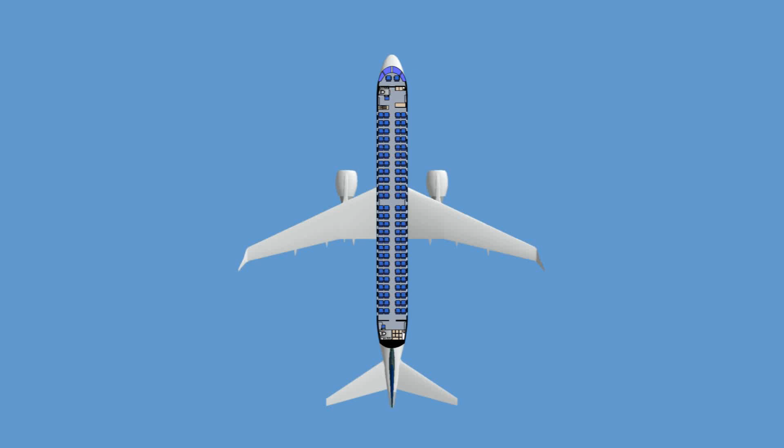The fire overheat protection system provides fire or smoke indication in the cockpit and cabin and enables the crew to extinguish the fire. The system is made up of the fire and smoke detection subsystem and the fire extinguishing subsystem.

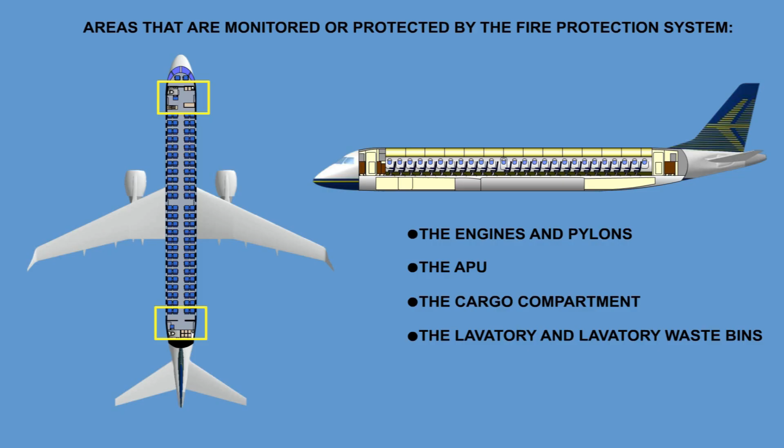Areas of the Embraer that are monitored or protected by the fire protection system include the engines and pylons, the APU, the 2 cargo compartments, the lavatories and lavatory waste bins. In addition, portable fire extinguishers are located in the cockpit and cabin.

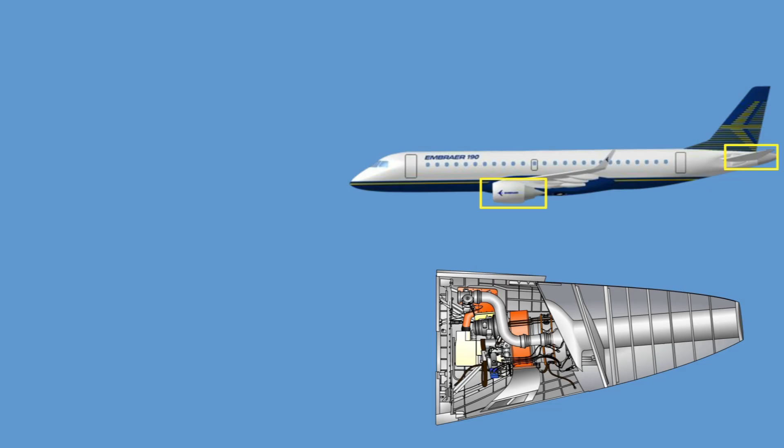The engines and APU are monitored by a fire and overheat detection system. If a fire occurs in either the engine or APU compartment, it can be extinguished by the respective fire extinguishing system. The cargo compartments are monitored by a smoke detection system. They are equipped with a single fire extinguishing system for both compartments, which is built around 2 fire extinguishing bottles.

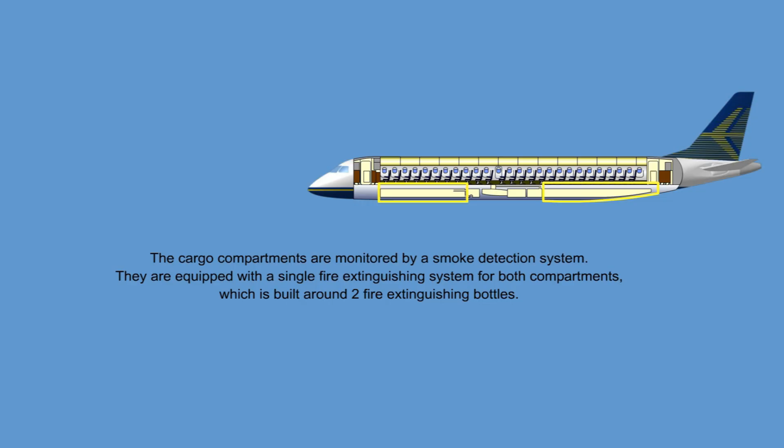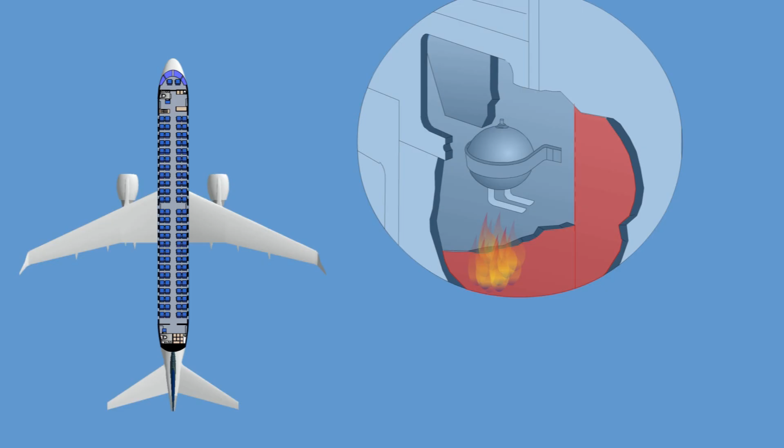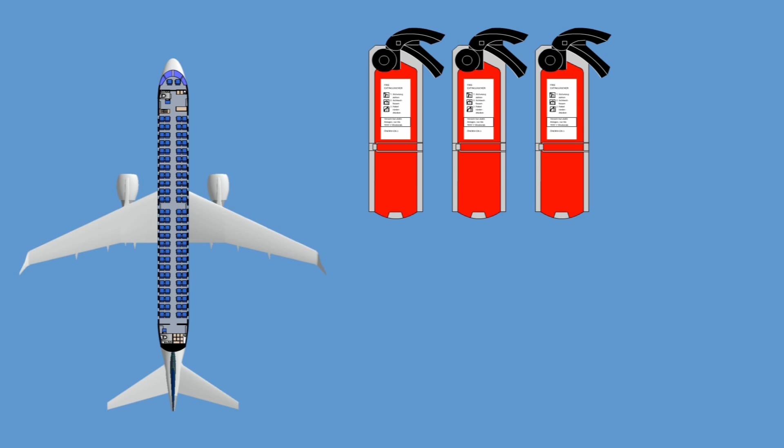The lavatories are equipped with a smoke detection system to alert the crew. In case of a fire in the lavatory waste bins, a fire extinguisher will automatically be discharged into the waste bin. To fight a fire on board, the crew can make use of the portable fire extinguishers installed in the cabin and cockpit areas.

The following equipment is installed on the overhead panel in the cockpit for indication and extinguishing of a fire. The left and right engine fire handles indicate a fire when a red light in the handle illuminates. Pulling the handle will shut down the respective engine. The handles are also used to extinguish the fire by rotating them left or right.

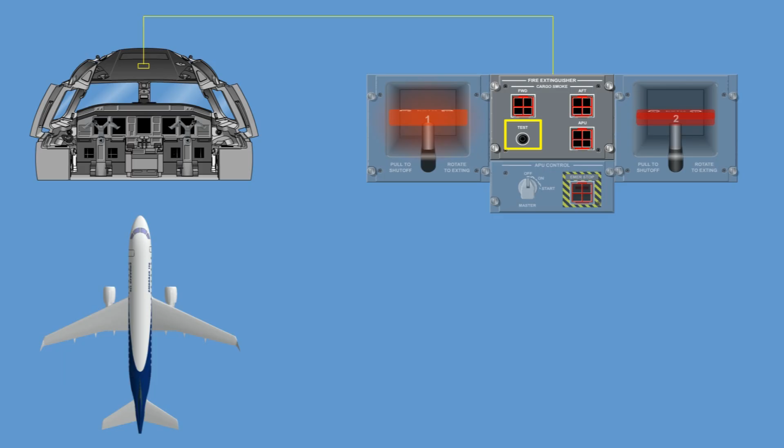The APU can be shut down by the crew in the event of a fire using the emergency stop button on the APU control panel. The fire extinguisher control panel, located between the fire handles, allows the crew to extinguish a fire in the cargo compartments and in the APU. A test switch allows testing of the entire fire detection system. If a fire is detected, the respective warning messages will be displayed on the EICAS and aural warnings will sound.

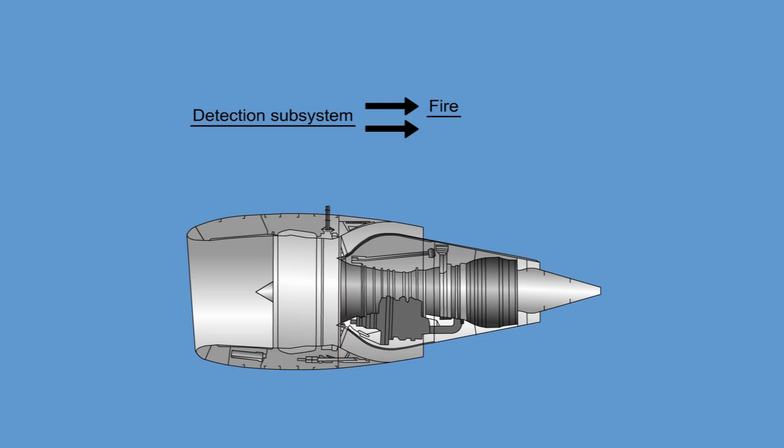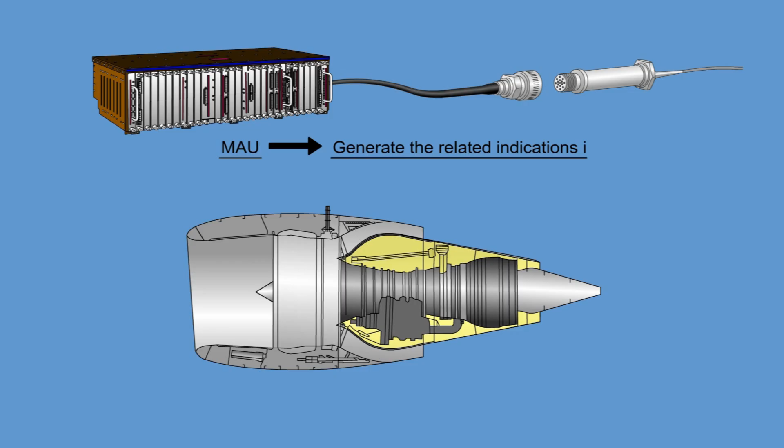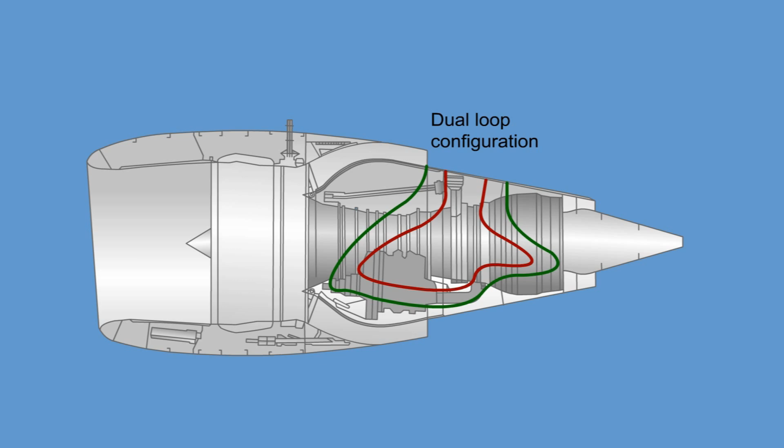The detection subsystem provides means for detection of fire or overheat conditions in the engine-designated fire zone by the use of fire detectors. These fire detectors are connected to the MAUs to generate the related indications in the cockpit. The fire detectors are installed in dual-loop configuration, which means that each detector of loop A will have a correspondent detector of loop B protecting the same area. This configuration allows the aircraft to be dispatched with one loop inoperative.

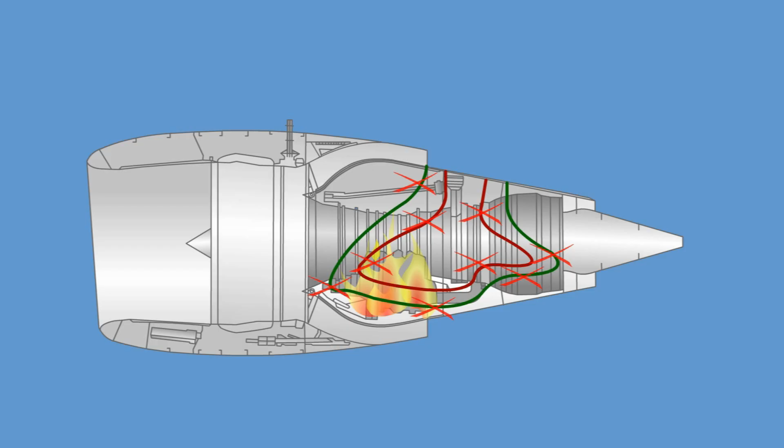During normal operation, both loops must detect a fire to provide a fire alarm in the cockpit. However, with one loop inoperative, the alarm will also be enabled when the remaining operative loop detects fire. If both loops are failed, an EICAS message is displayed.

In case of fire, the following indications are provided to the crew in the cockpit: the flashing master warning light, an aural warning in the cockpit, an engine 1 fire or engine 2 fire warning message on the EICAS, a fire inscription on the ITT icon, and a red light in the fire handle assigned to the engine where a fire was detected. The aural warning can be silenced by pushing the master warning button.

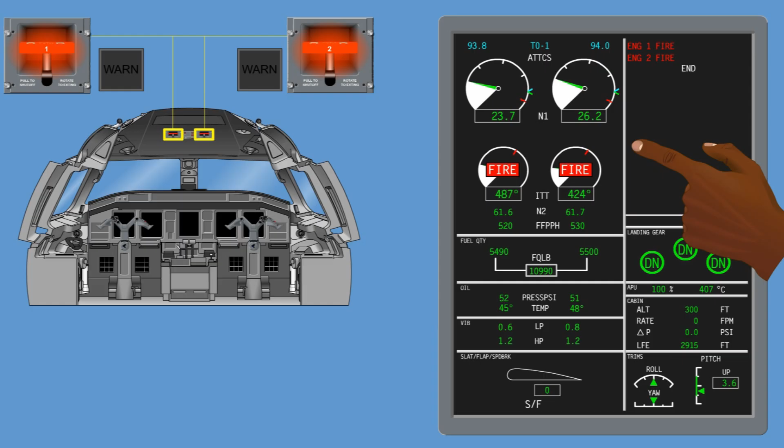The master warning light will then go off. However, the engine fire warning message and the red light in the fire handle will remain on until the fire is extinguished. The fire extinguisher panel in the cockpit allows the crew to manually test the fire detection system, fire illumination in the fire handles, warning messages, master warning push button, and the aural alarm.

Pushing this test also tests the APU fire and the cargo smoke detection systems. Performing the test with APU running should not take more than 10 seconds. Otherwise, the APU will shut down.

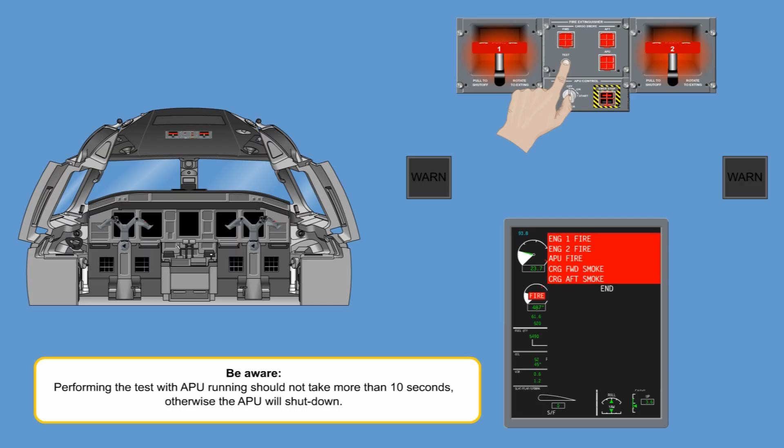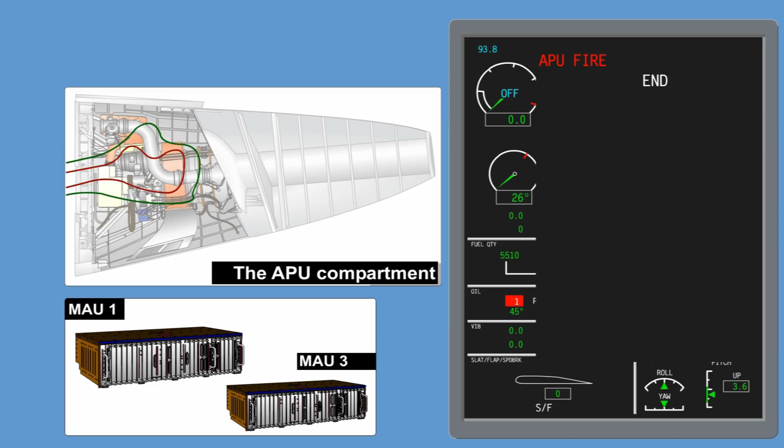The APU fire detection subsystem uses two pneumatic fire detectors to detect a fire or overheat condition in the APU compartment. The fire detectors are similar to the engine fire detector in design and function. The fire detectors are connected to MAU 1 and 3, which supply indications to the EICAS and CMC. The APU fire detection system receives electrical power from the essential DC buses via the MAUs. There are two loops with one detector each, protecting the same area.

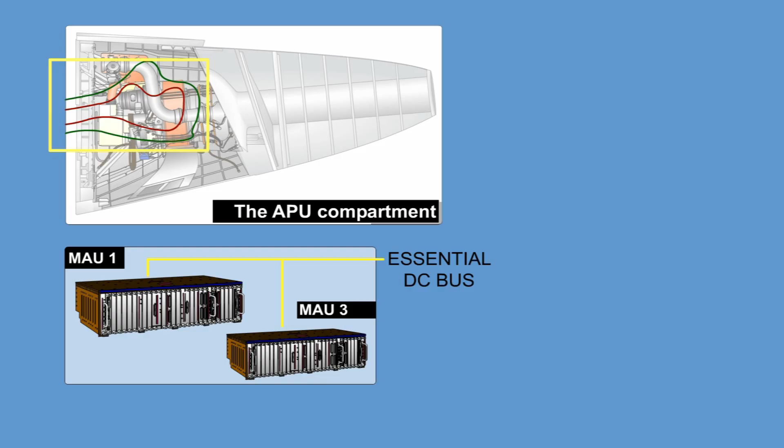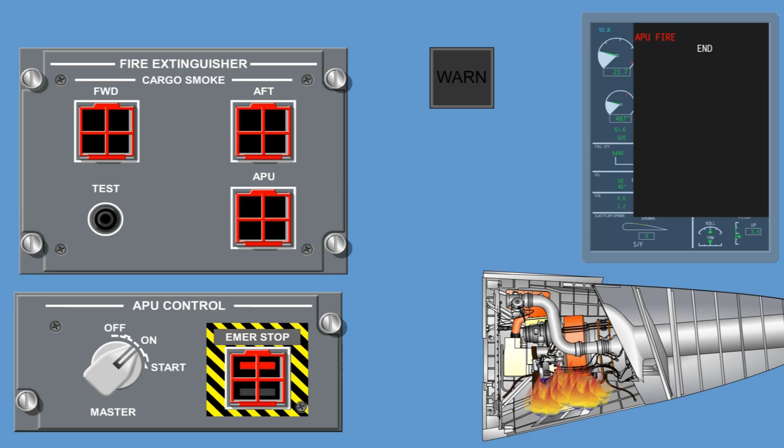If both loops detect a fire condition during normal operation, the MAUs will generate an APU fire warning message in the cockpit, and the red striped bar of the APU emergency stop button will be illuminated. When pressed, this button will shut down the APU immediately. The red illumination will turn off, illuminating the white striped bar of this button, and the APU fire extinguisher button will illuminate.

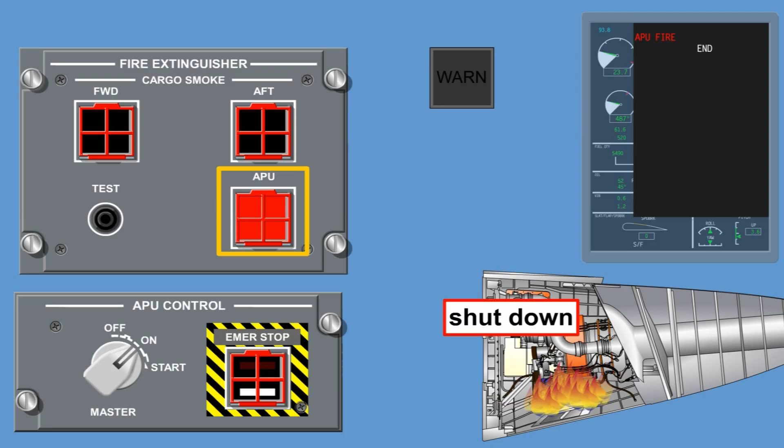If, in the event of fire, 1 minute has passed without the MAU receiving a positive indication that the APU emergency stop button was pressed, the APU fire extinguish button will illuminate. If there is an APU fire on ground, the APU will shut down automatically after 10 seconds if there is no commanded shutdown through the APU emergency stop switch.

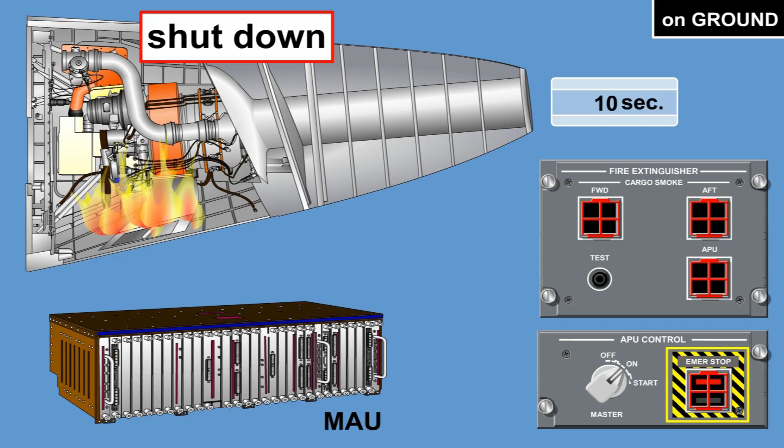The fire detectors will be continuously monitored. When both loops are failed, an APU fire detection fail message will be displayed on the EICAS. In case of a fire detector loop failure, the fire alarm will be provided in the cockpit when the operative loop detects fire.

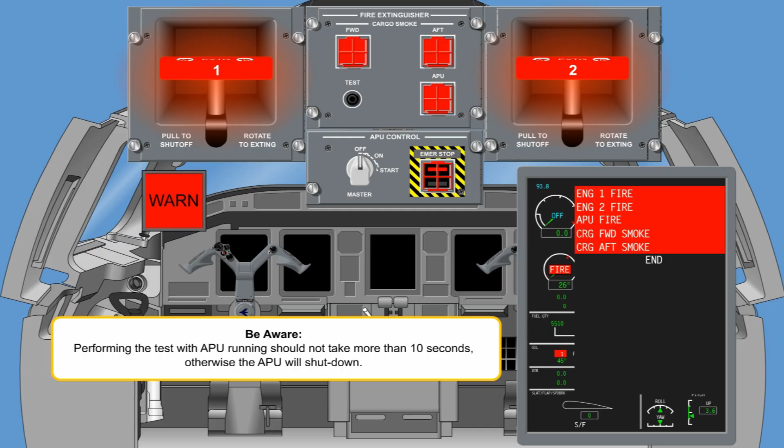A test button on the fire control panel is used to manually test the APU fire detection system. When pressed, the following will occur: illumination of APU emergency stop and APU fire extinguishing buttons, the master warning push buttons, APU fire CAS message, and aural fire warning. This test button will also test the main engine fire detection system and the cargo smoke detection system. Performing the test with APU running should not take more than 10 seconds. Otherwise, the APU will shut down.

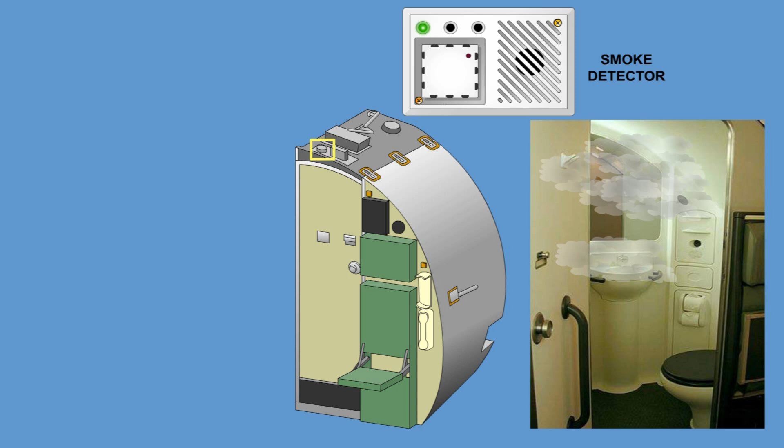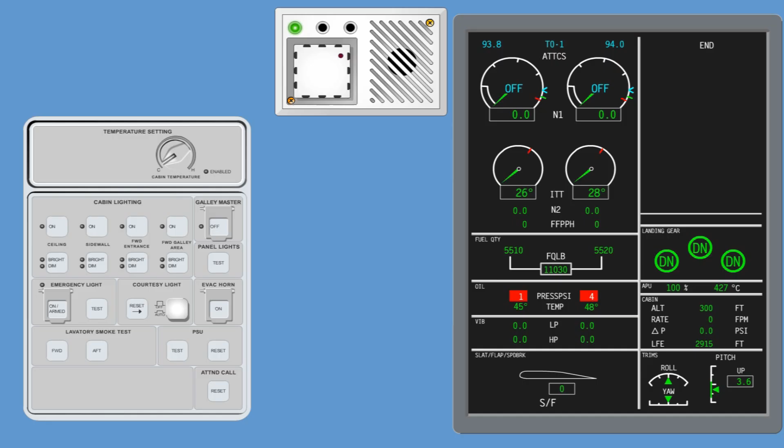The lavatory smoke detection system detects smoke in the lavatories and warns the crew. The system consists of smoke detectors mounted on the forward and aft lavatory ceiling panels and lavatory smoke test switches on the forward and aft flight attendant panel. The lavatory smoke detection system is provided with the following indications: CAS messages, aural indication through a smoke detector built-in chime, visual indication through the red alarm indicator light, and the forward and aft attendant light indicator panels.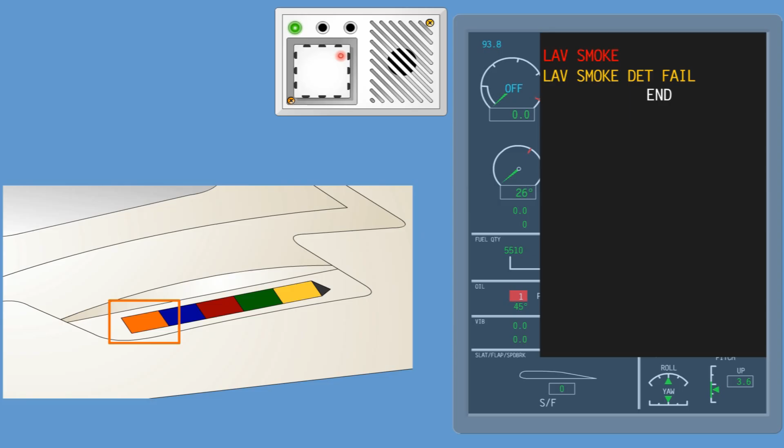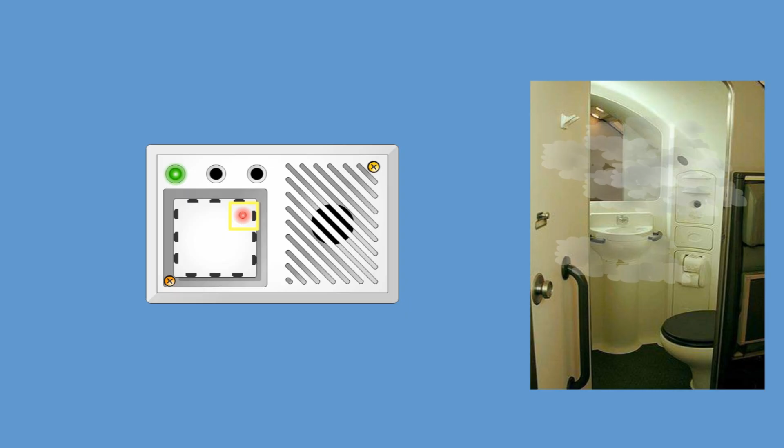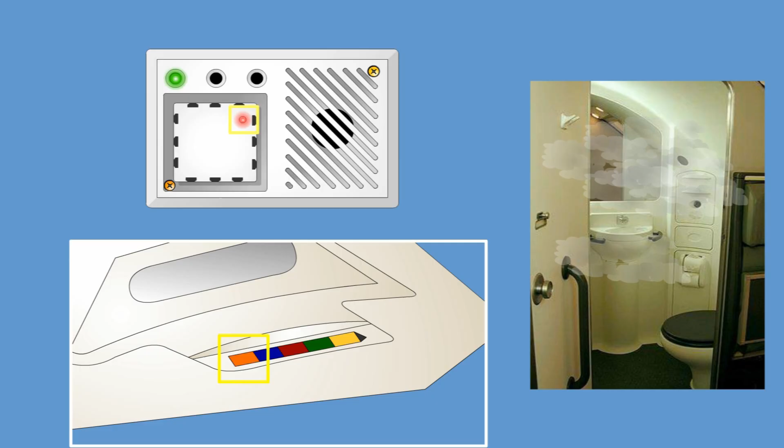When smoke is detected in any lavatory, the following sequence is initiated. An alarm will sound inside the lavatory where smoke has been detected. The chime is mounted into the lavatory smoke detector assembly and is audible from anywhere in the cabin. Additionally, the red alarm indicator will illuminate. The flashing amber light on the attendant light indicator panel will be activated, giving the cabin crew visual indication of the detection of smoke from anywhere in the passenger compartment, and a CAS warning message, "Lav smoke," in conjunction with the master warning indication, will illuminate in the cockpit.

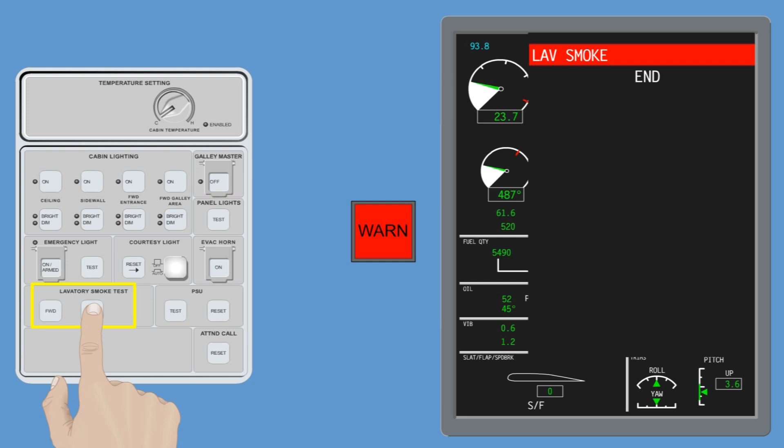System operation can be confirmed electrically by a self-test circuit, by pushing the built-in self-test switches on the forward flight attendant panel. When built-in test is initiated from the forward flight attendant panel, by pressing and holding the test switch for a particular lavatory, the smoke detectors, cabin crew, and flight crew indications are tested. After the test switch is released, the CAS message and the master warning indication are held for 7 seconds.

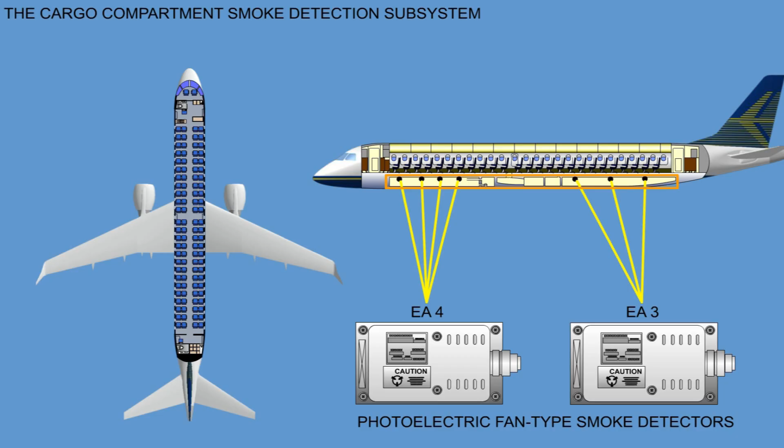The cargo compartment smoke detection subsystem is designed to detect smoke in the cargo compartment and turn off the ventilation in the forward cargo compartment. The system includes a group of ceiling-mounted photoelectric fan-type smoke detectors that are installed in recessed trays within the ceiling of the cargo compartments. Signals from the smoke detectors are routed to the flight deck via the MAUs, which process the necessary system information for the operating crew.

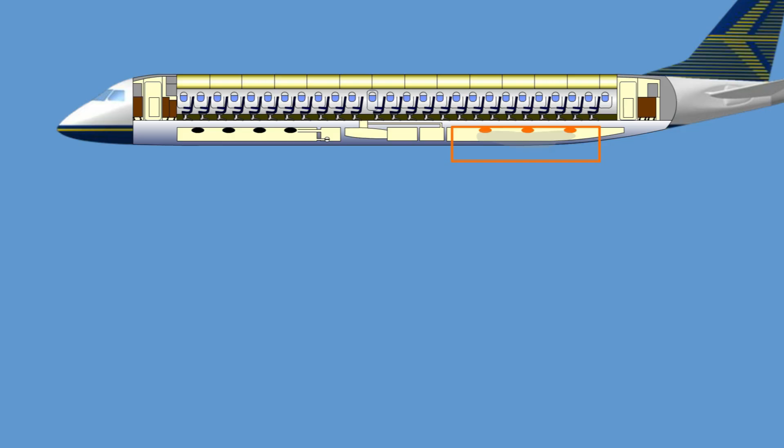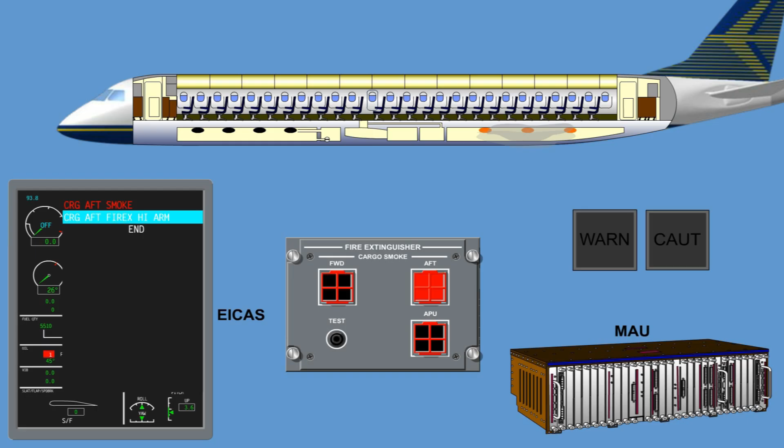In the rear cargo compartment, smoke must be detected by 2 independent smoke detector channels for an alarm to be reported to the flight deck. Indications include an audible alarm, master warning lights flashing, the aft cargo compartment fire extinguishing button illuminating, and cargo aft smoke and cargo FireX high armed messages on the EICAS.

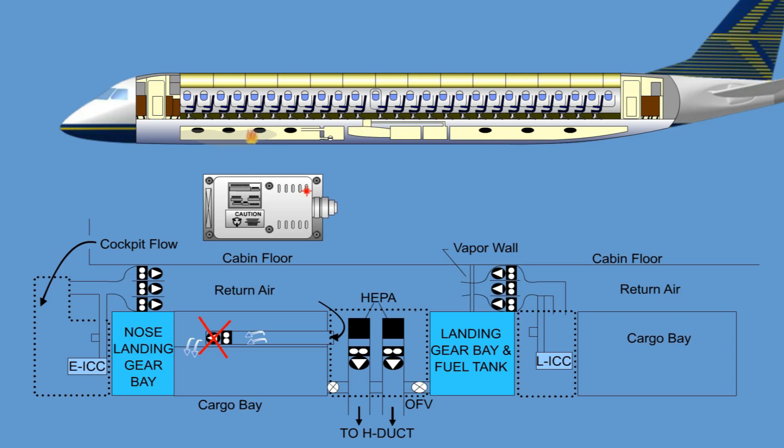The forward cargo compartment smoke detection system has a different configuration. As optional, it is equipped with an air circulation fan and cargo compartment shutoff valve. If only a single detector goes into alarm, fan operation is terminated and the cargo compartment shutoff valve is closed. The shutdown sequence starts in the forward cargo compartment without any cockpit annunciation activated. The air circulation fan is shut down for 60 seconds, and the remaining smoke detectors are monitored for 45 seconds in alarm condition.

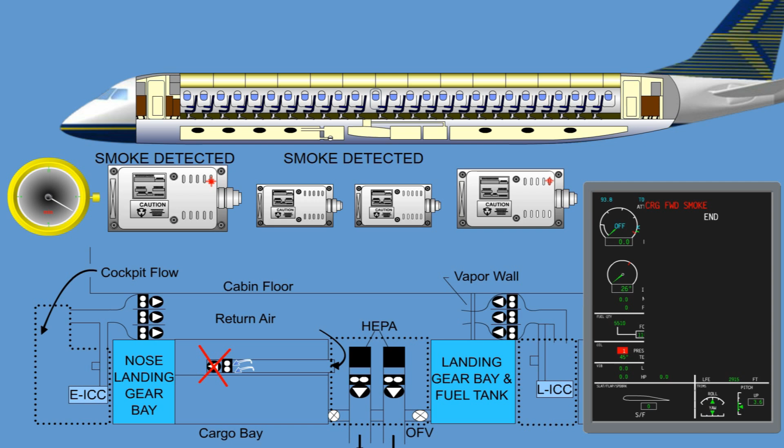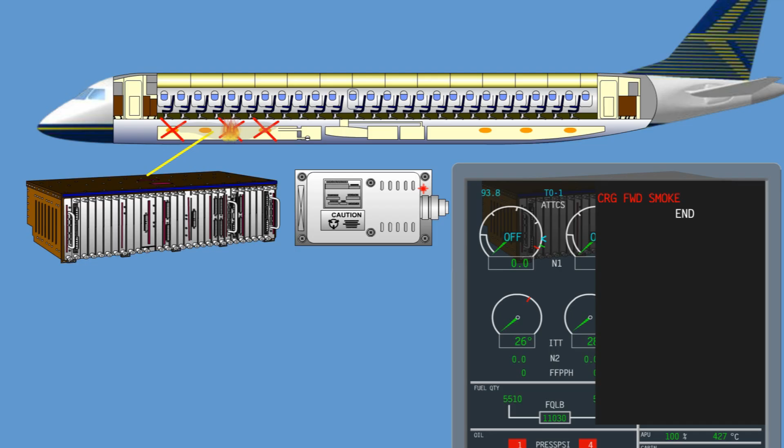Successful completion of the built-in test and absence of an alarm condition will result in the alarm being treated as a fault. Only if another detector goes into alarm within the 45 seconds is a cargo forward smoke annunciated in the cockpit. The smoke detectors are continuously monitored by built-in test. If only one smoke detector is available in one compartment, the MAU will automatically report a cargo forward or aft smoke when one smoke detector reports a fire alarm.

When the aircraft is on ground and a faulty smoke detector is realized, a cargo fire protection fault will be indicated on the EICAS. In the event that all smoke detectors in one cargo compartment have failed, a cargo forward or aft fire system fail message will be illuminated on the EICAS. Performing the test with APU running should not take more than 10 seconds, otherwise the APU will shut down.

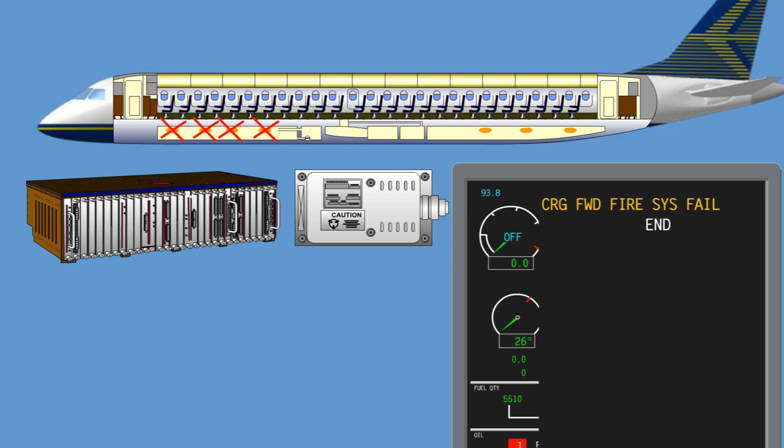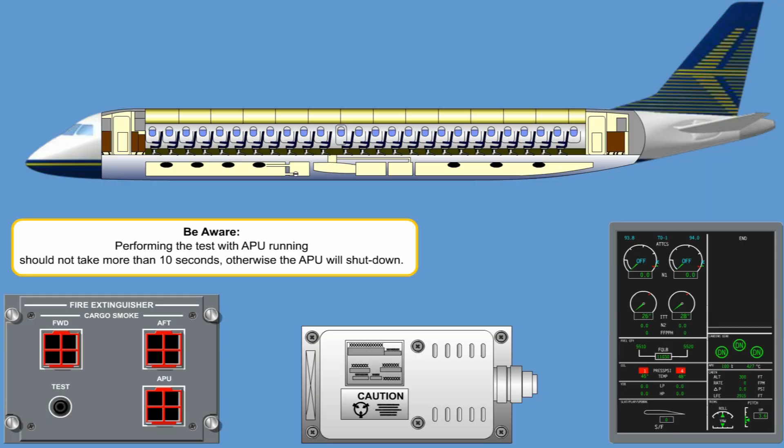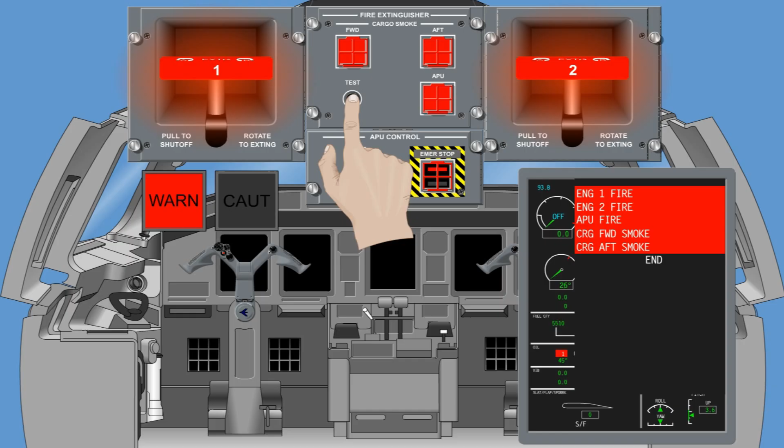The cargo compartment smoke detection system can be manually tested through a system test button located on the overhead panel. This test will verify that the smoke detectors and the flight deck interface components are functioning. Additionally, this test will verify that the fire extinguisher cartridges are not faulty. When the switch is pressed, the master warning lights will flash and the aural warning will sound. The cargo forward aft smoke message will illuminate. The cargo extinguisher lights will be activated. The forward cargo compartment fan will stop and the vent valve will close. In case the ventilation fan will not stop, cargo forward vent fail caution will illuminate.

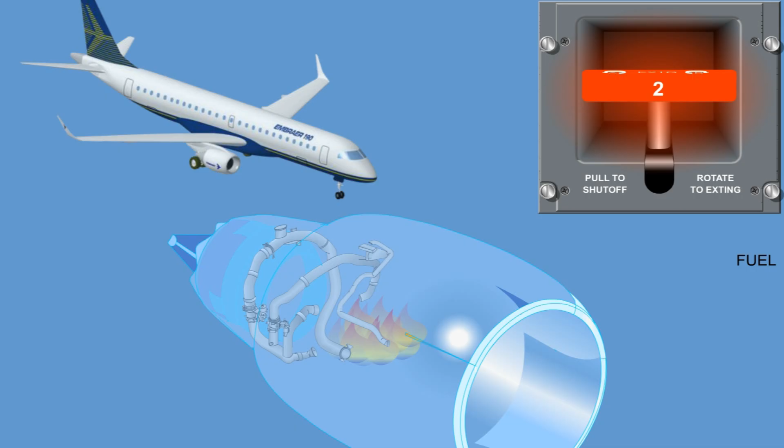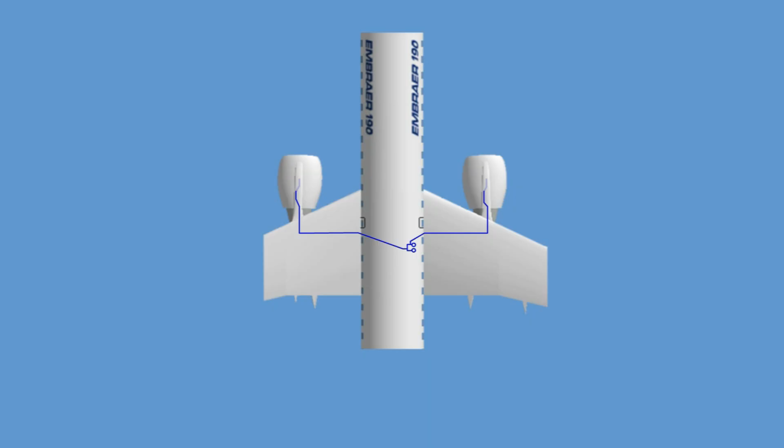The engine fire extinguishing system provides means to prevent fuel and hydraulic from flowing into the engine designated fire zone, as well as a means for extinguishing fire in the engine designated fire zone. 2 fire extinguisher bottles, A and B, are installed in the right-hand rear wing-to-fuselage fairing. This permits a dual shot function for one engine through the discharge tubing and nozzles. Firing of the bottles can only be controlled by cockpit command through the fire handles. The fire extinguishing agent is driven from the bottle to the engine fire zone by aluminum and stainless steel distribution pipes. The aluminum pipe is connected from the fire extinguisher bottle to the forward pylon.

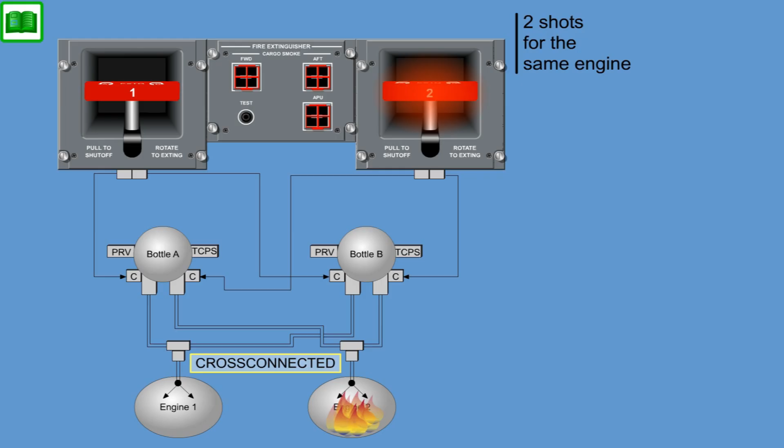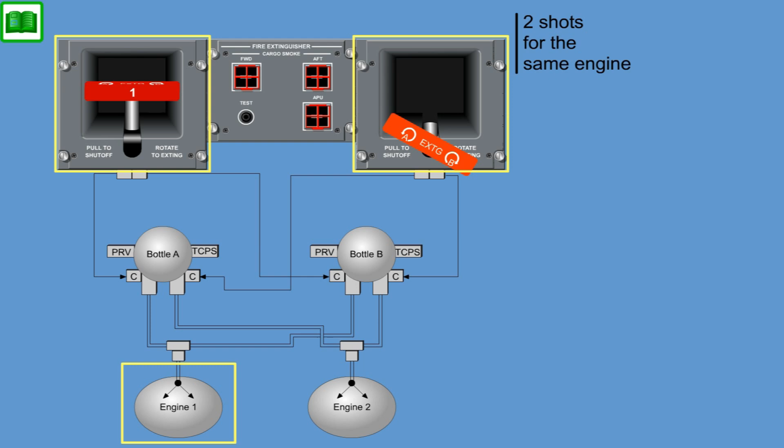Both fire extinguishing bottles are cross-connected, providing 2 shots for the same engine. Each shot, controlled by command from the cockpit, will discharge the fire extinguisher agent inside the requested Engine 1 or 2 fire zone.

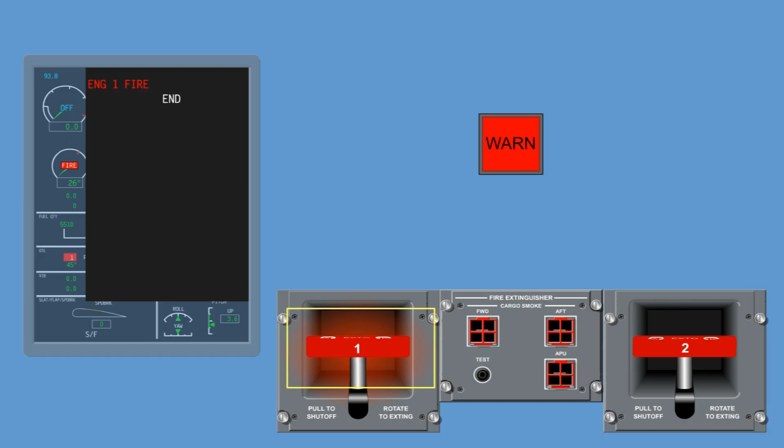If a fire warning illuminates for Engine 1, the related fire handle will illuminate in red. By pulling down this fire handle, the related engine fuel and hydraulic fluid flow will be stopped by closing the shutoff valves. The bleed air of the related engine will also be closed.

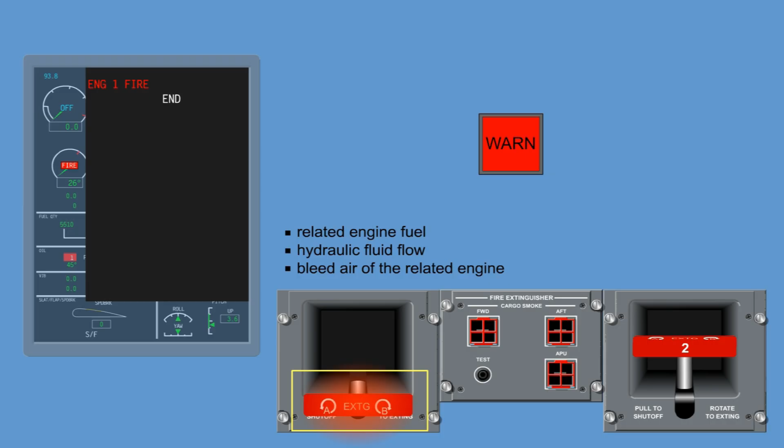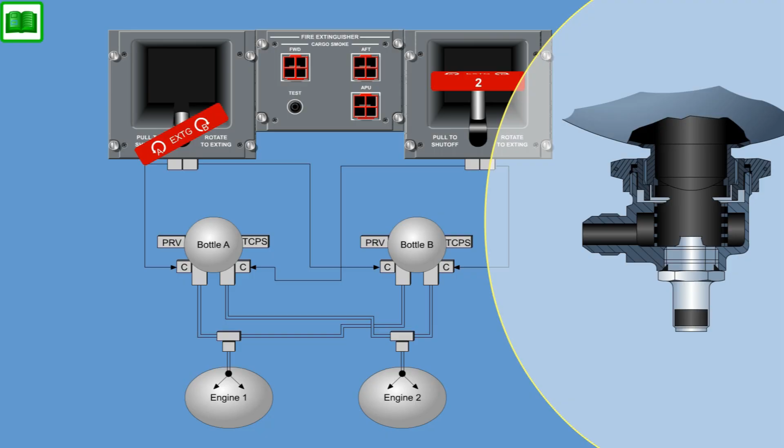By rotating the fire handle counterclockwise to extinguisher A, the explosive cartridge for Engine 1 on bottle A will detonate, and the fire extinguishing agent will be discharged into Engine 1 core compartment. After the fire extinguishing bottle is discharged, an Engine Firex Bottle A discharge message will appear on the EICAS. If the Engine 1 fire warning stays on, Bottle B can also be used for this engine.

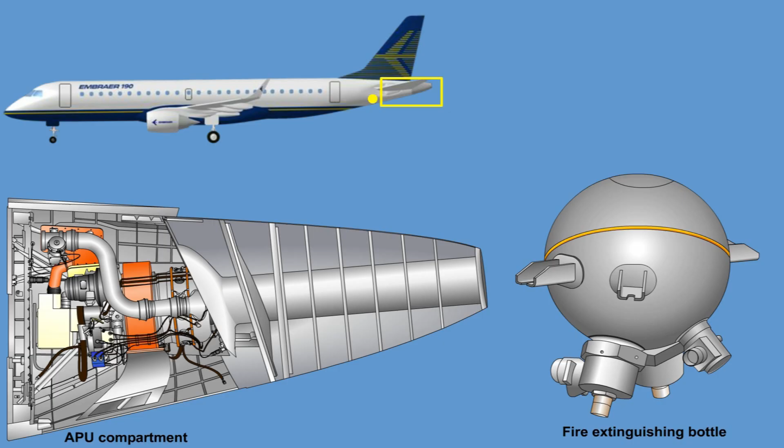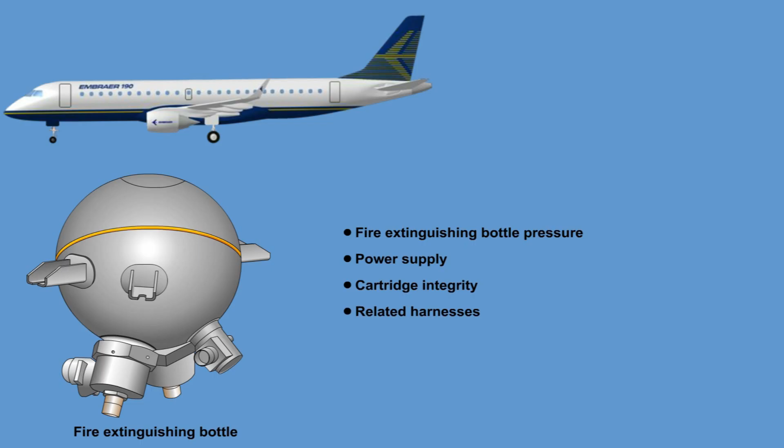The APU fire extinguishing subsystem is used to discharge one fire extinguishing bottle, which is installed in the rear fuselage, into the APU fire compartment. The fire extinguishing bottle discharge is controlled by command from the cockpit. The fire extinguishing bottle pressure, power supply, cartridge integrity, and related harnesses are continuously monitored. In case of a failure, a message will illuminate on the EICAS and on the CMC.

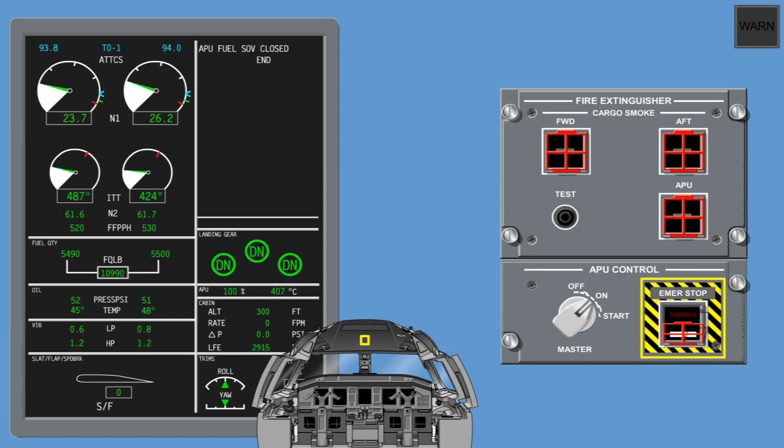When the guarded APU emergency stop button is pressed, the APU fuel shutoff valve will be commanded to close and the APU will shut down. Shutoff valve position is displayed on the EICAS. After the APU emergency stop button has been released, the APU shutoff valve can be reopened by rotating the APU master switch to the on position.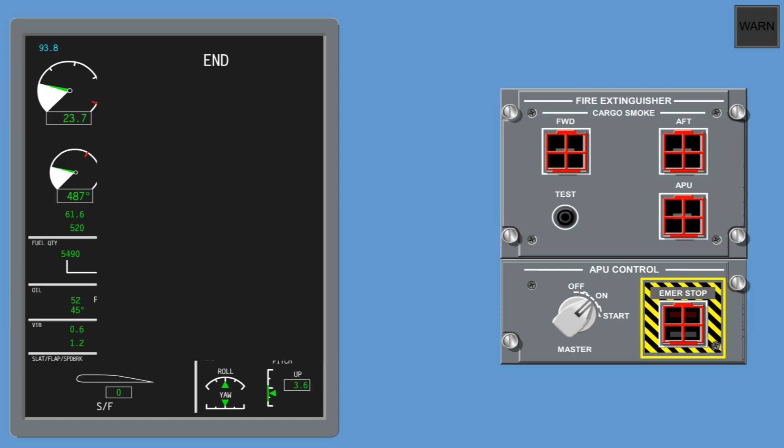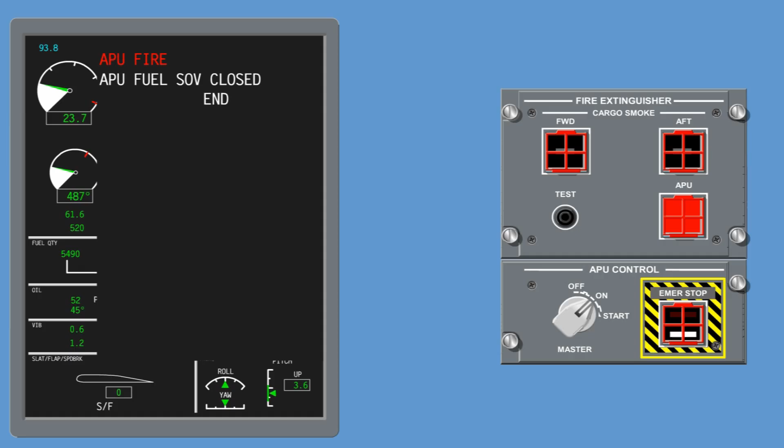In the event of an APU fire, by pressing the APU emergency stop button, the APU will stop and the fuel shutoff valve will close. To discharge the fire extinguishing agent into the APU fire zone, the APU fire extinguishing button should be pressed. By pressing the APU fire extinguishing button, the APU will shut down and the APU fuel shutoff valve will close when the APU emergency stop button has not been pressed before.

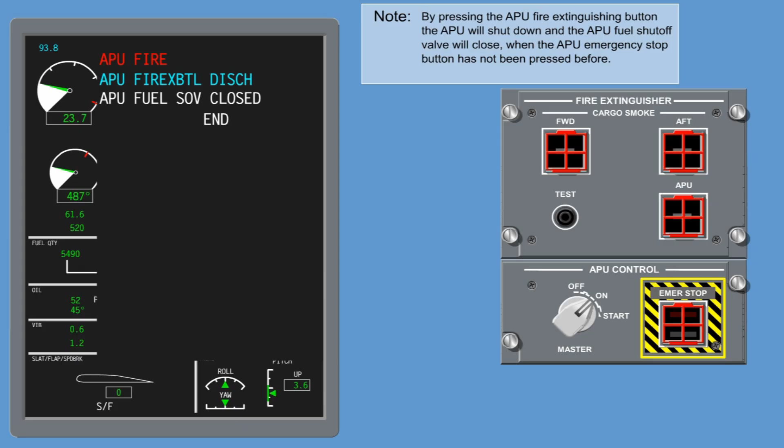The cargo compartment fire suppression subsystem supplies fire extinguishing agent to the cargo compartment to extinguish a fire. Fire extinguishing agent will also be supplied for up to 60 minutes to prevent a fire from reigniting. 2 fire extinguisher bottles are installed in the center E-bay. One high-rate discharge bottle is filled with 5.91 kilograms (13 pounds) Halon 1301, and one low-rate discharge bottle is filled with 9.98 kilograms (22 pounds) Halon 1301.

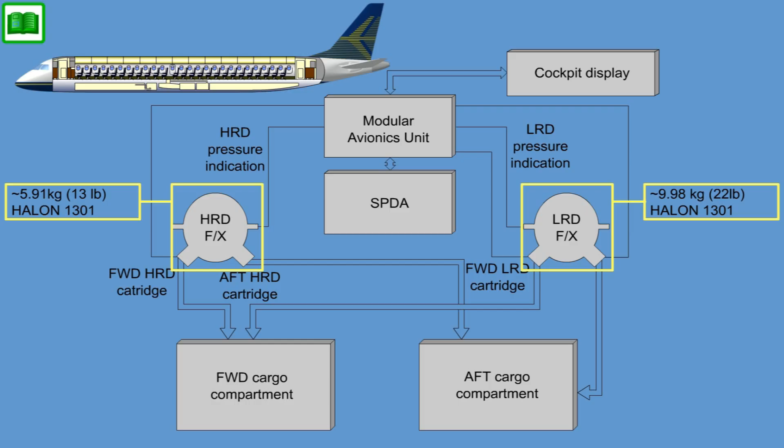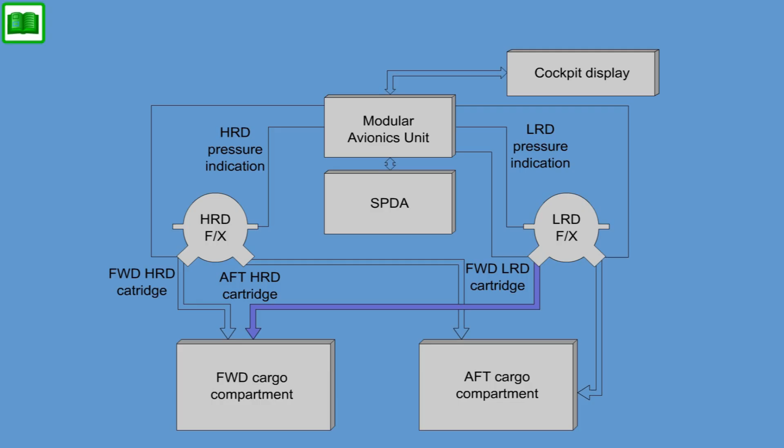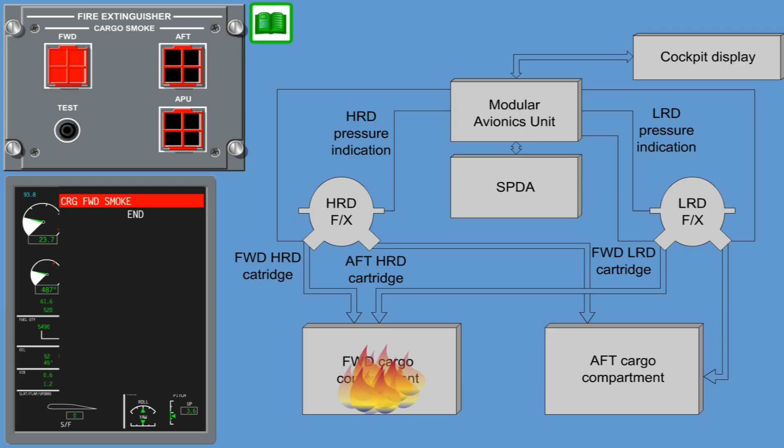They are equipped with dual outlets to discharge suppression agent into either of the cargo compartments. The high-rate gas flow is designed to extinguish the fire by filling the cargo compartment with the required concentration of Halon 1301, while the low-rate gas flow afterwards prevents reignition. Discharge is initiated by cockpit command. If a cargo fire occurs, the cargo smoke warning will be displayed in the cockpit and the appropriate cargo compartment fire extinguisher button will illuminate. This automatically arms the high-rate bottle.

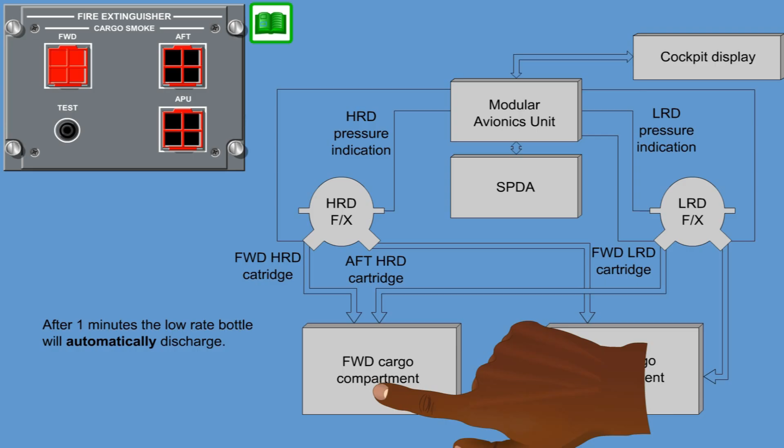By pressing the illuminated extinguisher button, the high-rate bottle will discharge into the related cargo compartment and the low-rate bottle will be armed. After 1 minute, the low-rate bottle will automatically discharge and distribute its agent via the dryer metering unit into the cargo compartment. The low-rate bottle can be discharged manually before the 1 minute has expired by pressing the extinguisher button again. The light in the button will go off after the low-rate bottle has been discharged. Note that the cargo smoke indication will stay on as long as the fire situation exists.

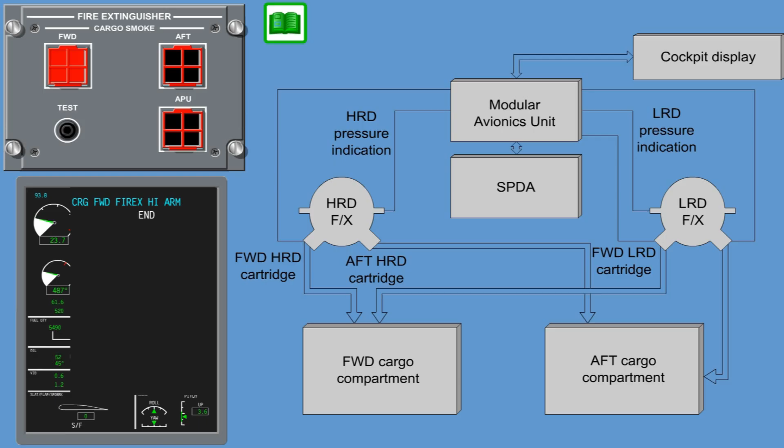The fire extinguishing system can be used even without a cargo smoke warning. The high-rate bottle is armed by pushing a cargo fire extinguisher button and is indicated by the red button light and EICAS message. If the button is pushed again within the next 2 minutes, the high-rate bottle will be discharged. Depending on whether or not the aircraft is weight on wheels, the sequence for the low-rate bottle is automatic in flight or manual on ground.

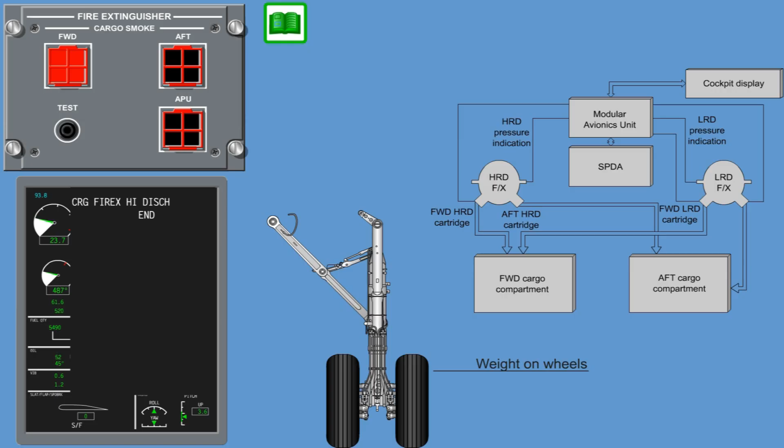In flight, the second bottle will fire automatically after 1 minute. On ground, the button has to be pushed twice to arm and to fire the low-rate bottle. If the button is not pressed a second time within 2 minutes after arming, the system will reset. When the fire test button is pressed, the system will reset.

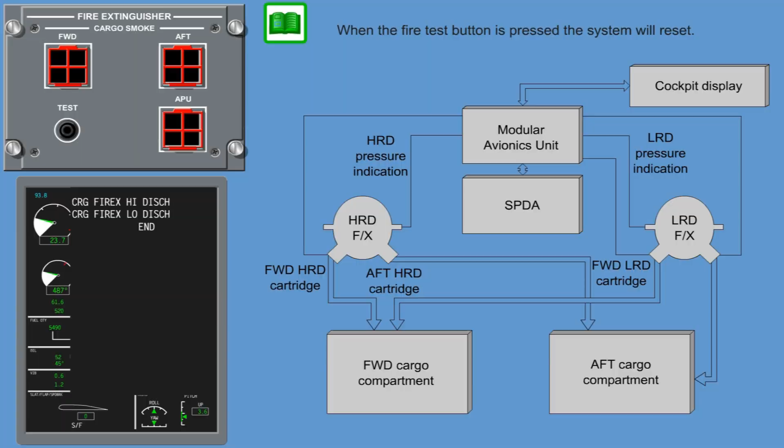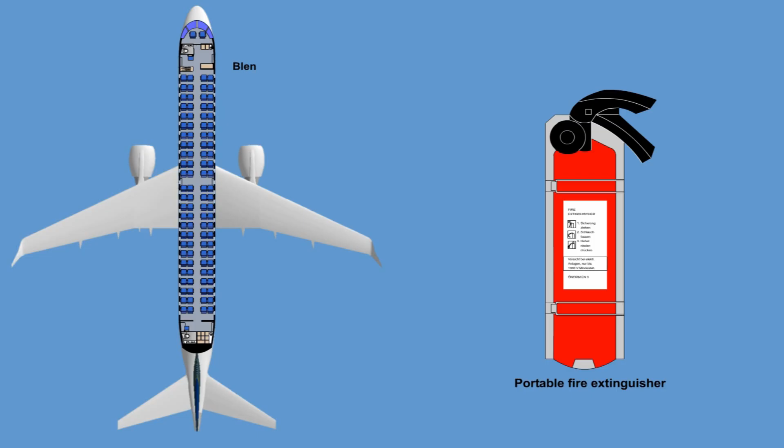To fight a fire on board, the crew can make use of the portable fire extinguishers installed in the cabin and cockpit areas. Each fire extinguisher contains a blended Halon 1211-1301 with low toxicity characteristics. One fire extinguisher is located on the left-hand side of the cockpit bulkhead, behind the pilot's seat, and there are fire extinguishers located in each galley area. The standard configuration will be equipped with 2.5 pounds Halon.

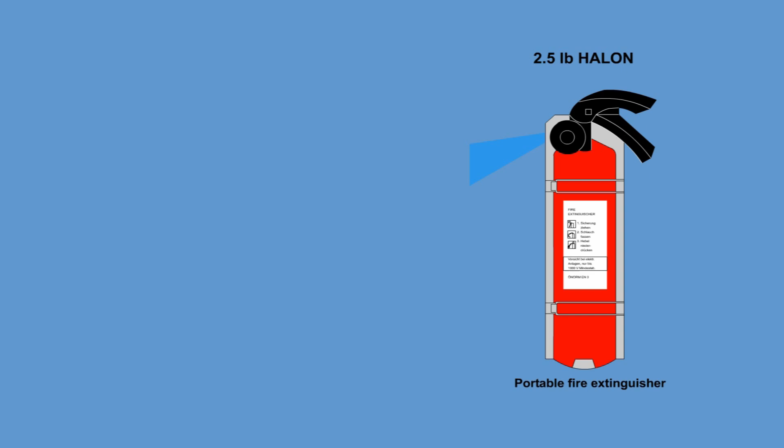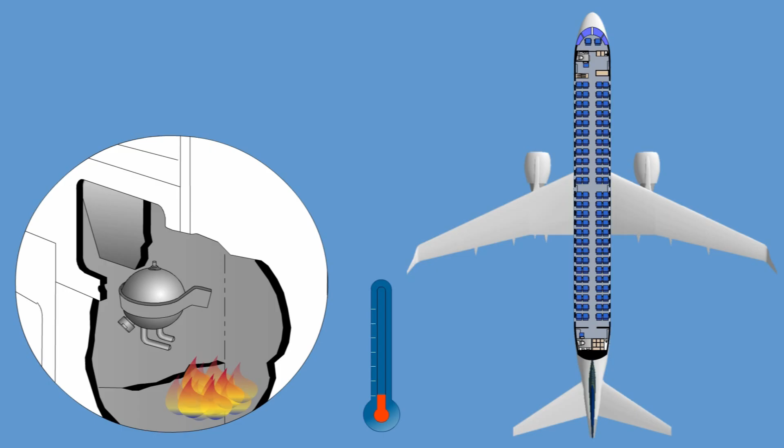If fire occurs inside the waste disposal, the auto-discharge fire extinguishing bottle will be automatically discharged. The tip at the end of each discharge tube will melt at a predetermined temperature, causing the bottle to fully discharge into the waste compartment and knock down the fire in the waste disposal. Discharge indication can be seen on this pressure gauge.